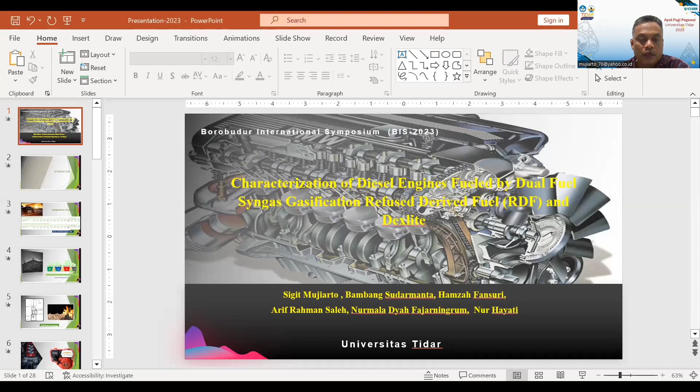I will present my research on characterization of a diesel engine fueled by dual fuel, syngas from gasification of refuse derived fuel, and Dexlite. My team consists of me, Sigit Mujiarto, Bambang Sudarmanta, Hamzah Fansuri, Arif Rahman Saleh, Nurmala Dyah Fajarningrum, and Nur Hayati.

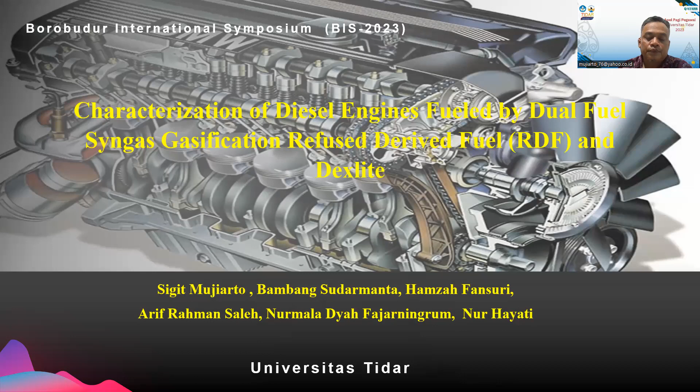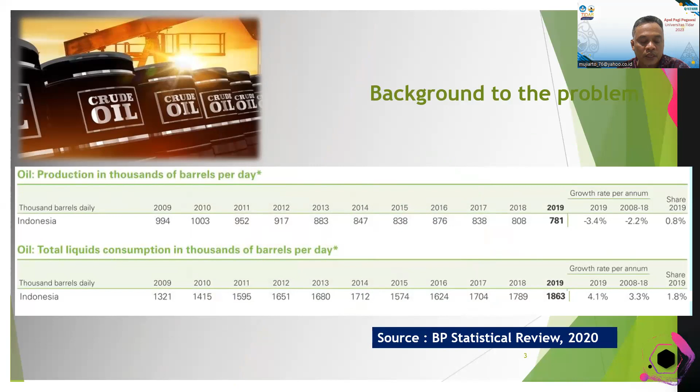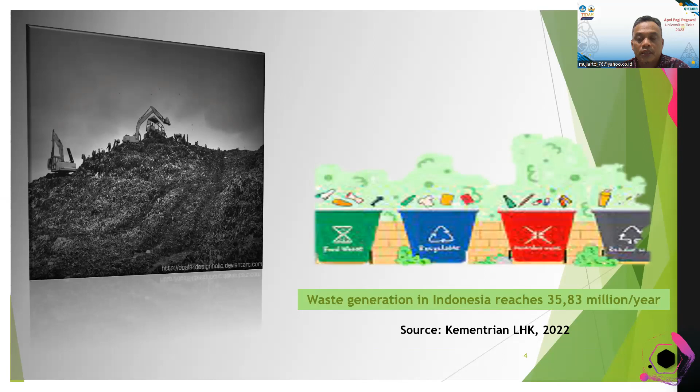Introduction. Background of the problem. One, there has been a decline in domestic oil production from year to year. This is the data. Two, there has been an increase in petroleum consumption from year to year, causing Indonesia to experience a shortage of fuel oil and making Indonesia a fuel importer country. Three, waste generation in 2022 reaches 35.83 million per year.

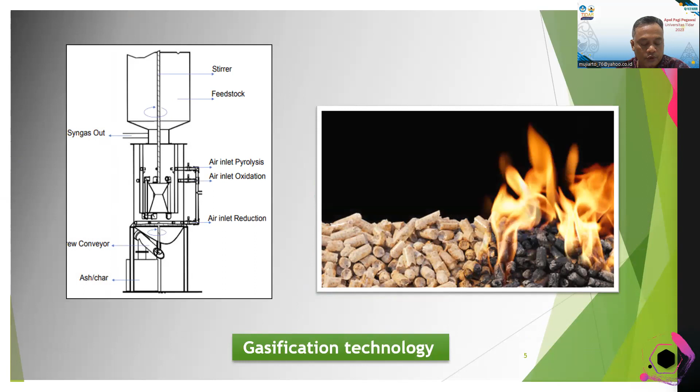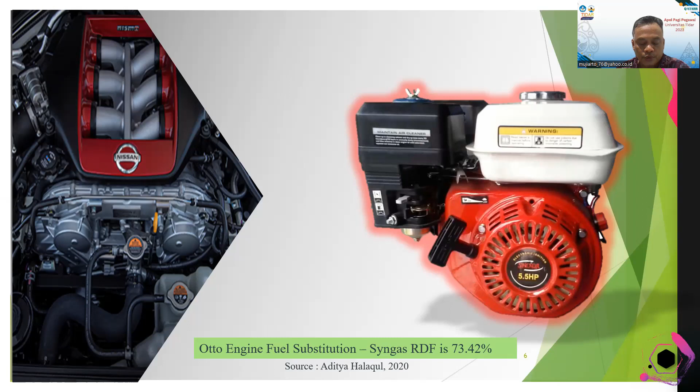Four, the development of gasification technology that can produce syngas from biomass, especially from waste, that can be used. Five, several previous studies used syngas from several biomass which could be used to substitute pertalite.

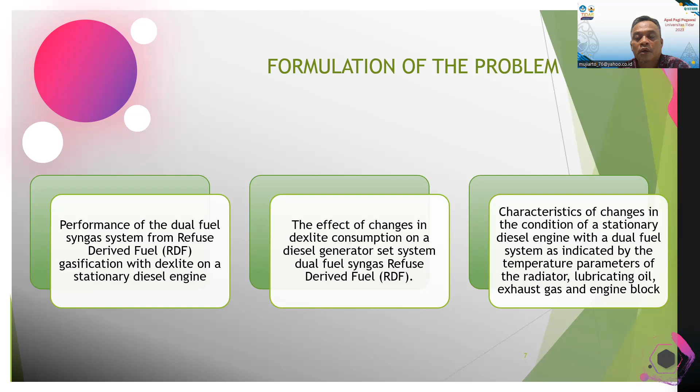Formulation of the problem. One, performance of the dual fuel syngas system from refuse derived fuel gasification with Dexlite on the stationary diesel engine. Two, the effect of change in Dexlite consumption on a diesel generator set system, dual fuel syngas refuse derived fuel, or RDF. Three, characteristics of change in the condition of the stationary diesel engine with a dual fuel system as indicated by the temperature parameters of the radiator, lubricating oil, exhaust gas and engine block.

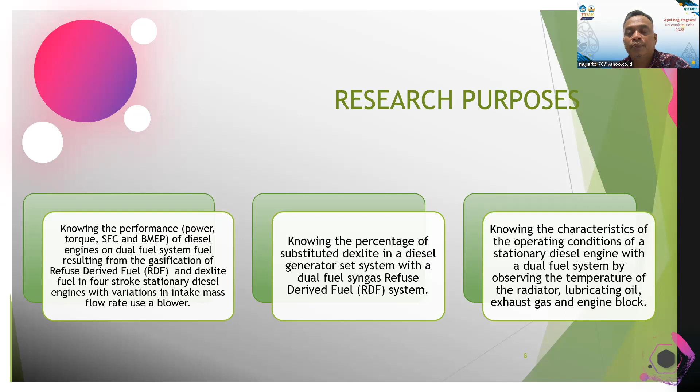Research purpose. One, knowing the performance, power, torque, SFC, and BMEP of the diesel engine on the dual fuel system, fuel resulting from the gasification of refuse derived fuel RDF and diesel fuel, in a four-stroke stationary diesel engine with variation of intake mass flow rate using a blower. Two, knowing the percentage of diesel substitution in a diesel generator set system with a dual fuel syngas refuse derived fuel system. Three, knowing the characteristics of the operating conditions of the stationary diesel engine with a dual fuel system by observing the temperature of the radiator, lubricating oil, exhaust gas, and engine block.

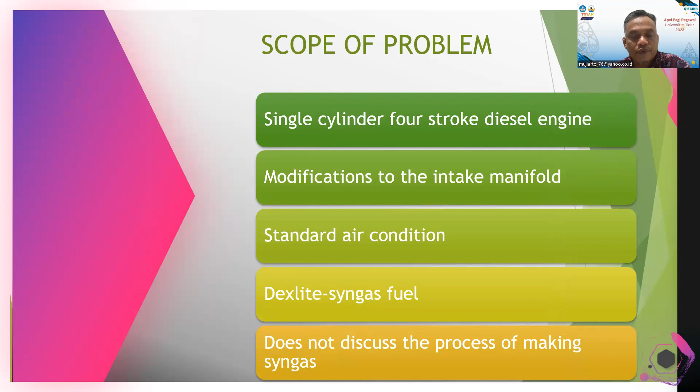Scope of problem. One, single cylinder 4-stroke diesel engine. Two, modification to the intake manifold. Three, standard air condition. Four, diesel and syngas fuel. Five, doesn't discuss the process of making syngas.

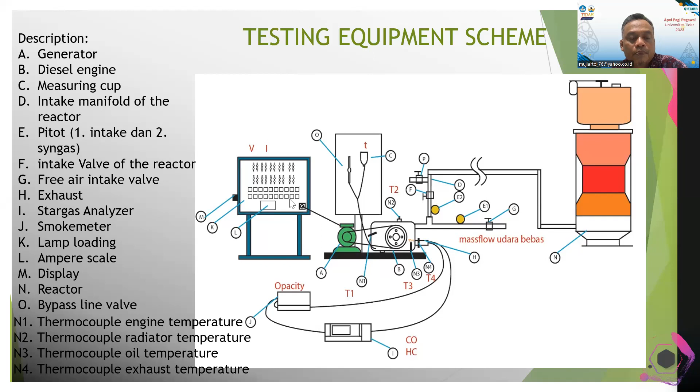Research methodology. This is the testing equipment schema. It consists of generator, diesel engine, measuring cup, intake manifold of the reactor, air intake and syngas, intake valve of the reactor, free air intake valve, exhaust, gas analyzer, smoke meter, lamp loading, ampere scale, display, reactor bypass line valve, and thermocouple.

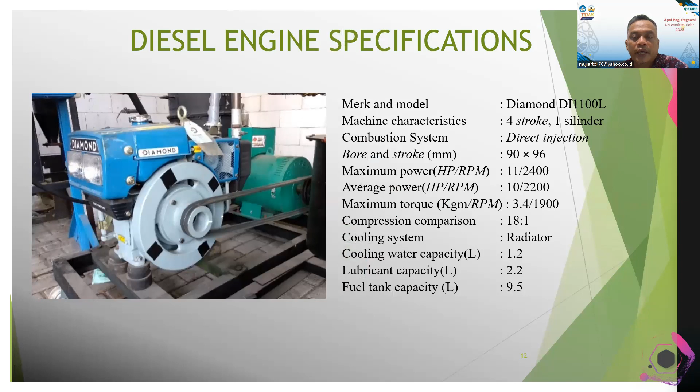Diesel engine specification. We use a diesel engine, mark and model Diamond DI1100L. Testing measuring tools consist of pipette volumeter, thermocouple, power meter display, thermocouple logger, and digital tachometer, smoke meter, stopwatch, gas analyzer, and mass flow meter.

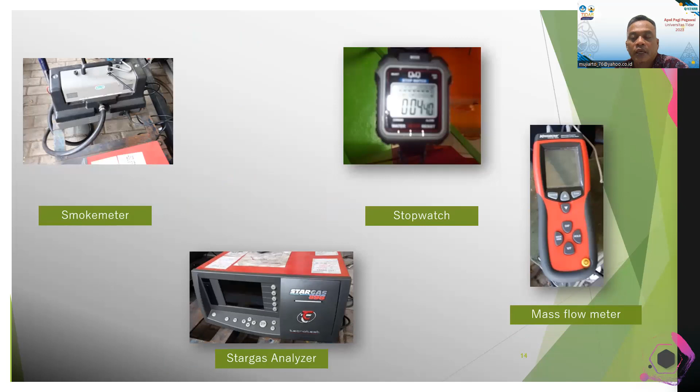Testing parameters consist of input parameters and output parameters. Input parameters consist of a diesel engine and diesel generator set, engine speed 2,200 RPM, diesel and syngas fuel, volumetric pipette volume 10 milliliter, mass flow rate, and electric load. Measured: particulate matter, voltage, current, operating temperature, mass flow intake, diesel consumption time. Calculated: diesel engine performance, power, torque, SFC and BMEP, AFR, and diesel substitution.

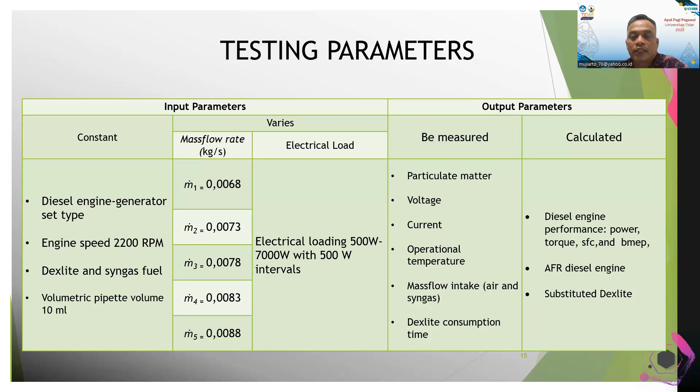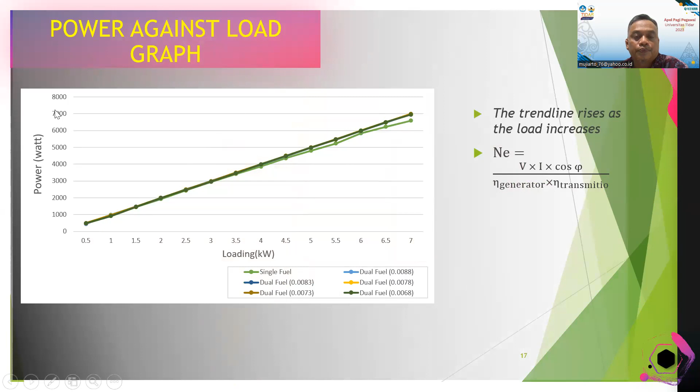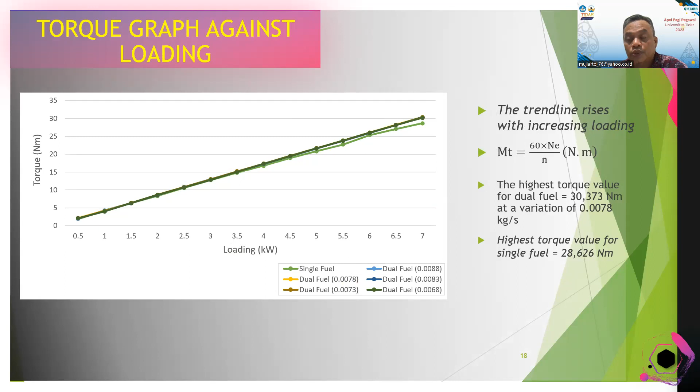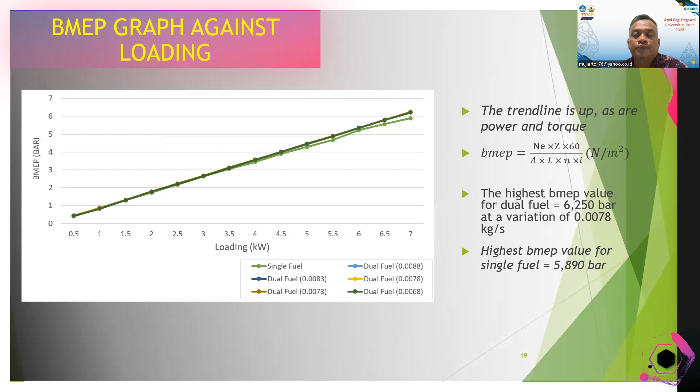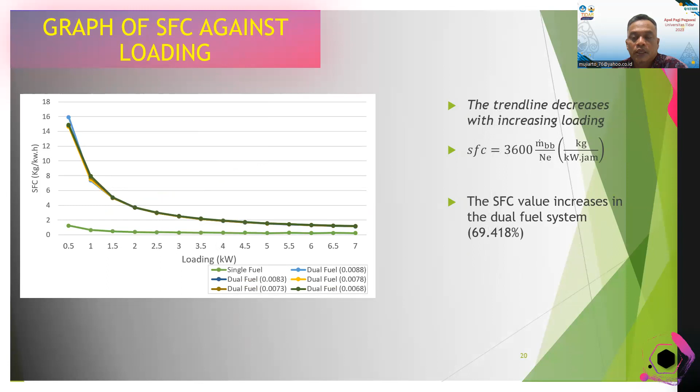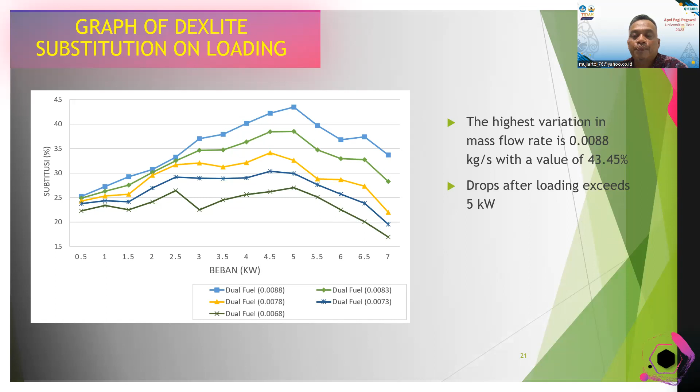BMEP graph against loading. The trend line is up, as with power and torque. Graph of SFC against loading. The trend line decreases with increasing loading. The SFC value increases in the dual fuel system by 69.418%. Graph of Dexlite substitution against loading. The highest is at the mass flow rate variation of 0.0088 kilogram per second with a value of 43.45%. It drops after loading exceeds 5 kilowatt.

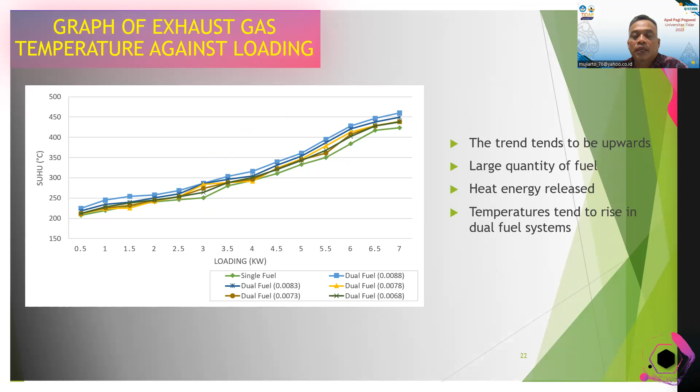Graph of exhaust gas temperature against loading. The trend tends to be upward. Large quantity of fuel, heat energy release, temperature tends to rise in the dual fuel system. Graph of oil temperature against loading. The trend tends to be upward. Large quantity of fuel, oil absorbs heat from the cylinder. Temperatures tend to rise in the dual fuel system.

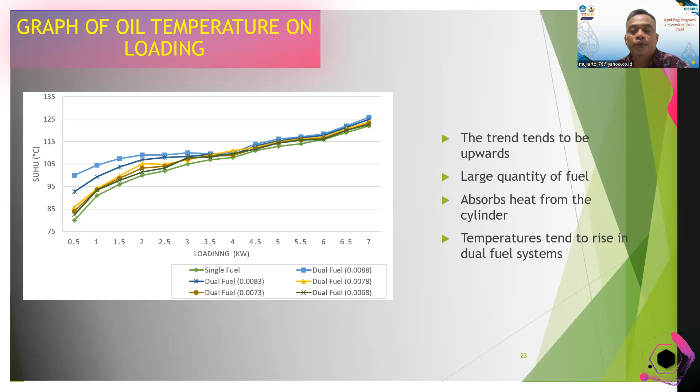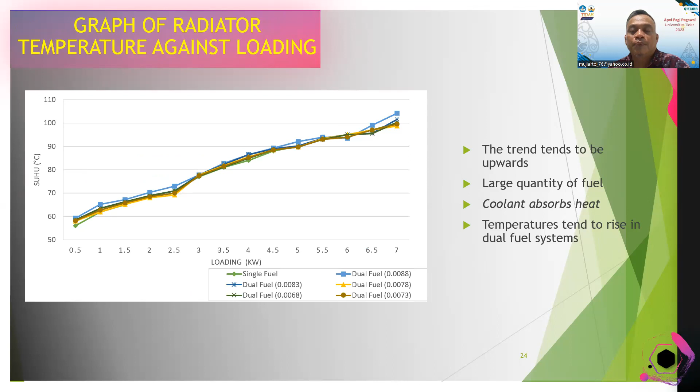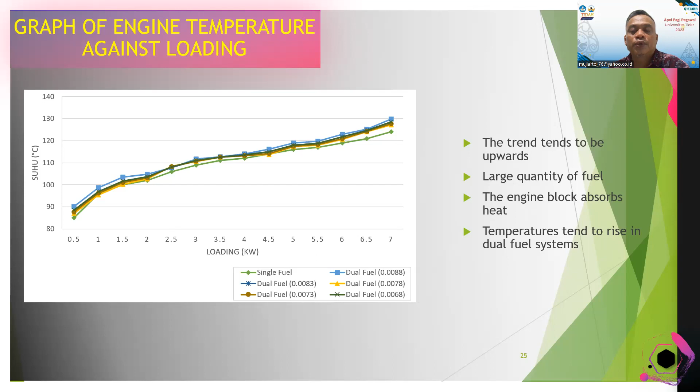Conclusions. The results obtained for this diesel engine performance are as follows. At a load of 7,000 watts, the highest power and torque recorded by the single fuel system were respectively 6.59 kilowatt and 28.62 Newton meter, while the highest power and torque recorded by the dual fuel system was at the mass flow rate variation of 0.0078 kilogram per second, namely 6.99 kilowatt and 30.37 Newton meter.

At the load of 7,000 watts, the highest SFC for the single fuel system was recorded at 0.260 kilogram per kilowatt hour, while for the dual fuel system, the highest result was recorded at a mass flow rate variation of 0.0088 kilogram per second, which was 1.141 kilogram per kilowatt hour. By using a dual fuel system, the highest percentage of dexlite substitution by syngas was recorded at a mass flow rate variation of 0.0088 kilogram per second, namely 43.45% at a load of 5,000 watts.

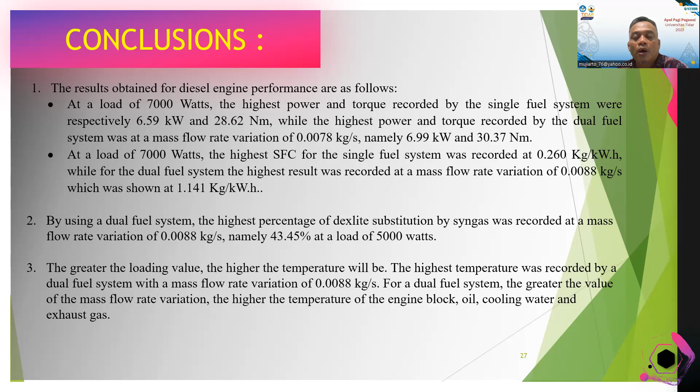The greater the loading value, the higher the temperature will be. The highest temperature was recorded by the dual fuel system with a mass flow rate variation of 0.0088 kilogram per second. The greater the value of the mass flow rate variation, the higher the temperature of the engine block, oil, cooling water, and exhaust gas.